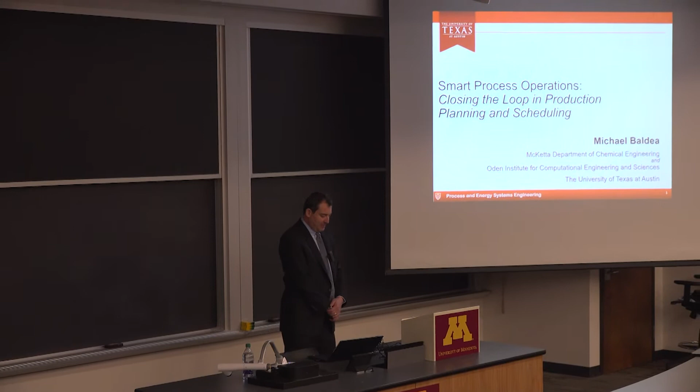All right. Thank you. Thank you for the kind introduction and for the invitation. I'm deeply, deeply honored to be here, honored and humbled to be back and see what the department has become. It was excellent in the day, and if I could say, it's more excellent now. I will say that it feels weird to be on this side of B75, so I took a lot of classes sitting on that side. I usually tend to sit towards the back, so it's okay. And it's a pleasure. It's a pleasure to be here.

And I will say this invitation really sent me down memory lane a little bit. So some nostalgia when I got it, and made me think of what we did back then. This is 16 years ago. It was a very nice group and a very intellectually stimulating group that we had. So a lot of work, but a lot of fun. So this is at the Daoutidis family home. We did a lot of globe-trotting travel. This was back in Romania, 15 years almost to the day. And I'm happy to report that Professor Daoutidis hasn't aged a single bit. Inside too. Inside too. So this was 15 years ago.

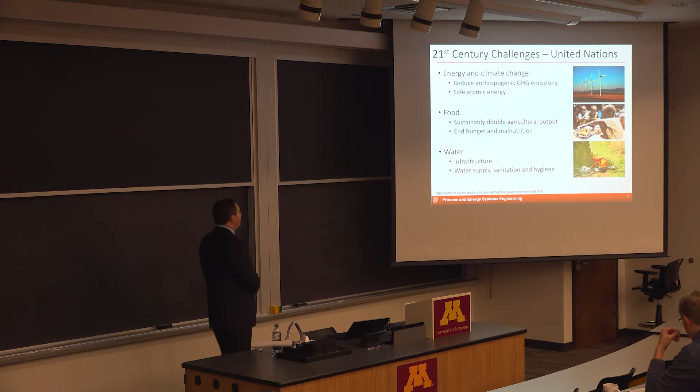This was the first decade of the new century, the new millennium. We're now in the third decade. And we're facing probably different problems than we were facing back then. Maybe not as different, but certainly more acute. So what I will talk about today is how systems engineering can and should be considered as one of the tools to take care of pressing issues that we as a planet are facing. And the United Nations took care of trying to set the framework for us, trying to define what the problems are. And obviously, as you'd expect, at the top of the list are energy, climate change, and then food and water. And this nexus of food, energy, water has been coined, and is something that a lot of people are looking into.

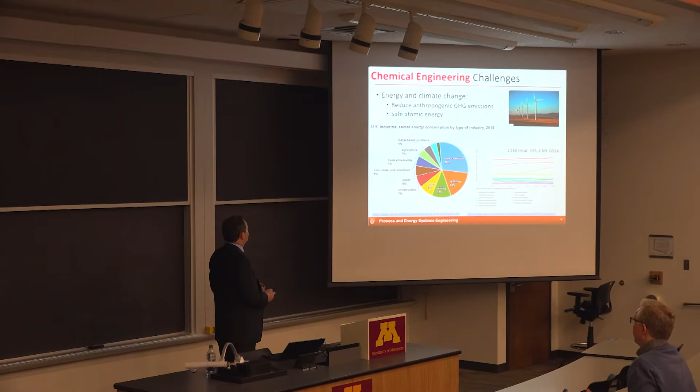But what I want to talk about today is how and why these are chemical engineering challenges. So why are they chemical engineering challenges? If we look at this picture, these are data from the Energy Information Administration. And the picture that we see here is that the chemical industry, at least in the United States, is a huge player in the energy field. So this shows the distribution of energy consumption in industry. And you see here that chemical and refining, which I argue is also chemical production, makes up a good chunk of that. Okay, so we're looking at close to 50%.

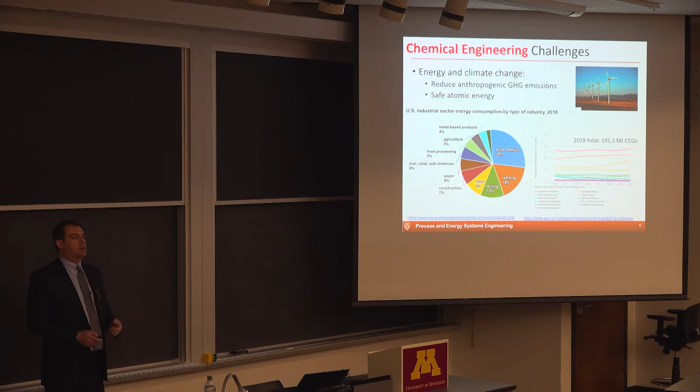So energy use and then carbon or greenhouse gas emissions, we're high up there, right, and growing. So the chemical industry is a huge factor in this landscape, this picture. And the natural question is, so we at the undergrad level, we teach process design, and it's a natural question to ask, well, can we design a new chemical industry that would be greener, more energy efficient, less impactful from an environmental point of view?

And if you look at the literature, there's a slew of papers you can go through, and it would seem that, yes, we can. So we can turn biomass into fuels. We can make plastics out of renewable things and so on. And so I think looking through all this, I think the answer in Minnesota style is you betcha, right? We can design a new industry. I think that's not the main question.

But I think the critical look at this literature and these results is that these studies tend to minimize, and again, we go back to our process design class real quick, they try to minimize the per unit costs. And we think back of basic things in our curriculum, and we say, well, that means we have to have larger and larger plants, right? So your economy of scale should kick in, and the bigger the plant you make, the cheaper the product per unit is going to be.

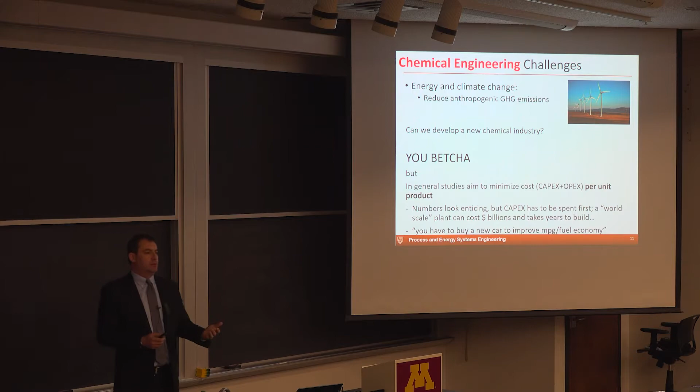The problem with that is a large-scale plant, a world-scale plant that would utilize some renewable things to make useful products is going to cost billions. So even the largest chemical company can't afford to do that. They can maybe afford one project like that at once, right? And they're really betting the farm. Two of them, if both of them fail, they're out of business.

So essentially what this is telling us is that you might actually have to buy a new car to improve your gas mileage and so on. So the question is, is that really what we want to do? And your grandma would be telling you that, well, maybe you can change the way you drive your existing car in order to improve your fuel economy.

So the realistic alternative to our current energy problems in the here and now is to look at how we can utilize existing assets, existing plants, in a way that's adapted to the current context, to the current energy landscape. So the question I'm going to ask today is, how do we adapt the operation of existing assets to the current context?

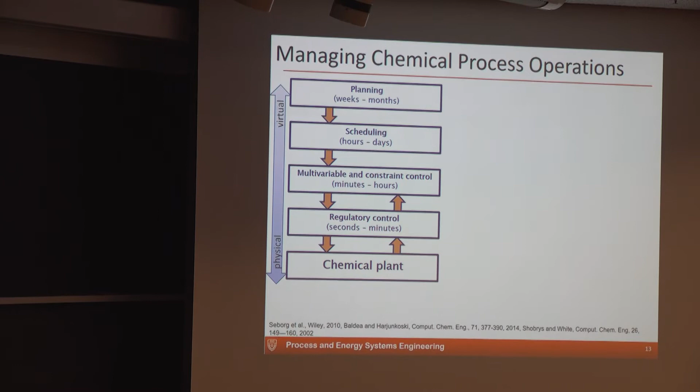So just to give you some background as to what I'm referring to, what exactly does it mean that we operate the chemical plant? So if we have a physical facility, there are several layers of decisions that have to be made in the process of its operation. And these decisions go in a hierarchy. We start with what's called production planning, and simply put, that's what to make, when to make it, and what quantity, such that we meet market demand and maximize profit.

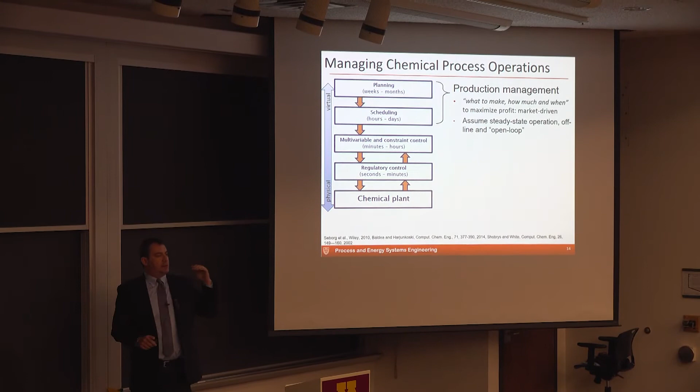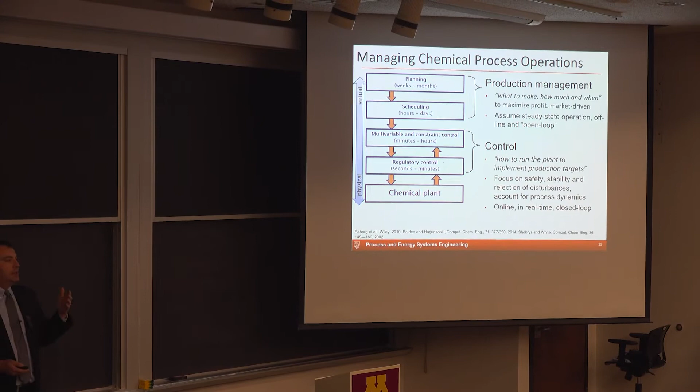And here, the main assumption is that we are operating at the steady state, so we have this facility, it will run for a while, it will make the same thing, then we switch to a different thing, and so on. By the way, these decisions are made over a long time horizon, so these are business decisions. And then in the here and now, we have control. So control is based on measuring current conditions, making decisions on that basis. This is done in real time, it's done online, and it accounts for the dynamics of the process. Here, since we're assuming everything is at steady state, we don't account for the dynamics of the process explicitly, at least.

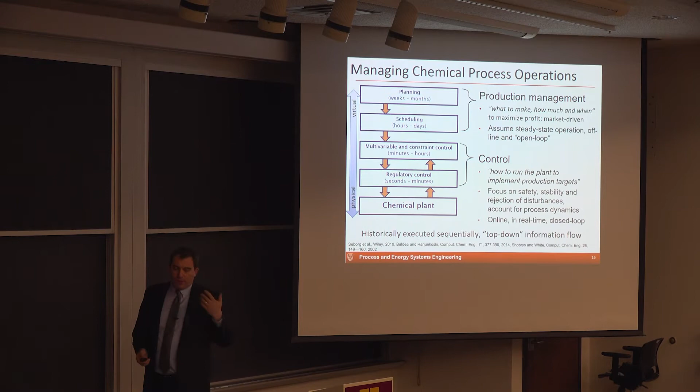Right, so here we have a hierarchy of decisions. This is how it's been done, top down. So whoever was in production management, the business entity, would tell plant operators who were in charge of the control system what to do, and there was not much feedback going on in the other direction. So naturally, when we started looking at this problem, we asked ourselves, is this established paradigm, by the way, this is adapted, just made prettier, from the textbook that you guys are using here for control, still true in today's world? So let's challenge these assumptions.

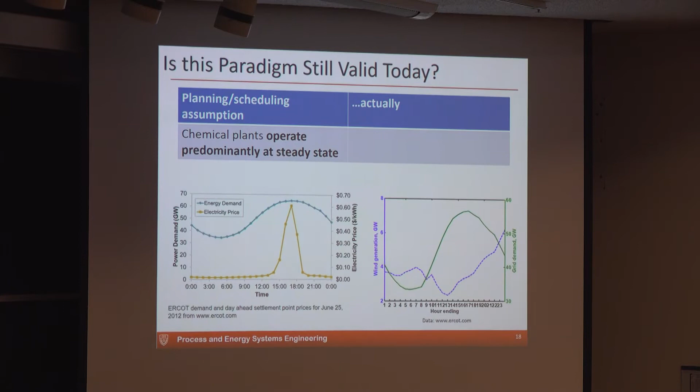And those are obviously driven by demand. So people get home at 5 p.m. and turn on the air conditioners and so on. So demand is going to be high on the grid at that point, and it's low early in the morning.

Right? They're also driven by the fact that now there can be up to 50% renewables on the grid. So wind blows harder early in the morning, so there's excessive electricity at this point. So electricity prices can actually go negative in real time, but this is desynchronized from demand.

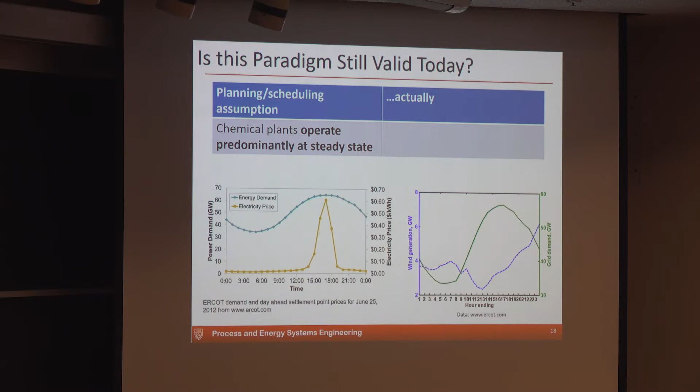So the point of showing you these data is that market conditions today are different from what they were. And market conditions today are highly, highly variable. So if you're the operator of a chemical plant that uses electricity, then you have to think of an operating strategy that can ride out that peak price and take advantage of the lows.

So you can think of an operating strategy where you up production when prices are low, so electricity is cheap, store whatever material you made in excess, and then when the prices of electricity go up, you would want to drop production, lower your power draw from the grid, and use the stored material to meet demand at this point.

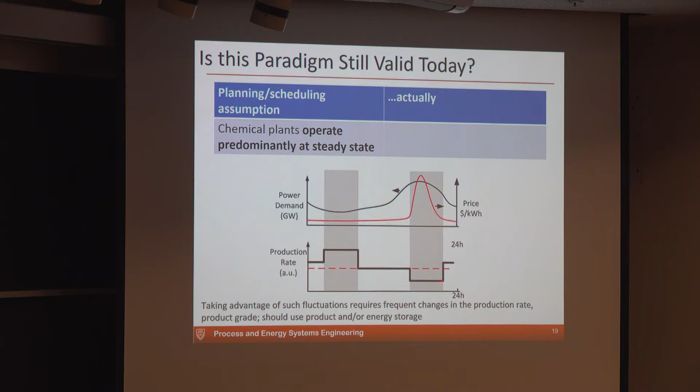So, of course, this strategy now requires very frequent changes in production rates. So you're no longer operating at a steady level, but you'll be going up and down quite a bit, right? So I will say this first fundamental assumption, that a chemical plant will be spending most of the time coasting along a steady state, is false in today's context.

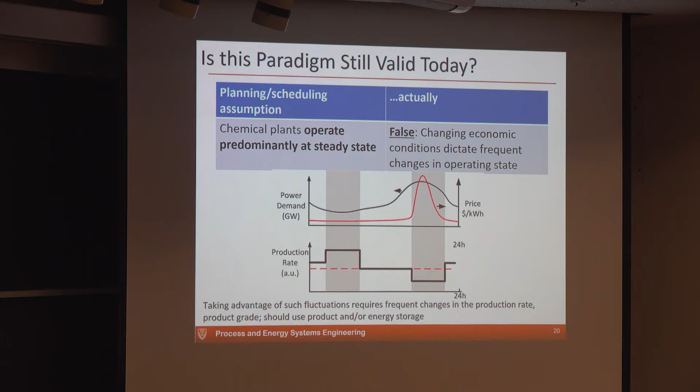We also assume oftentimes when business entities make their calculations that switching from one operating state to another, from one product to another, takes a lot less time than you spend operating at that steady state. Right? So these transitions can be done quickly or the time is negligible.

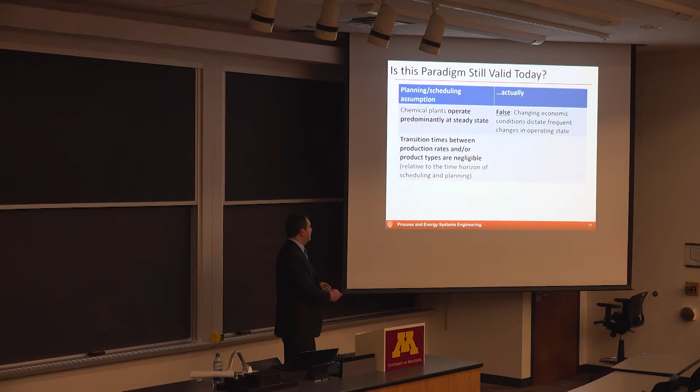So is that true? Let's look at the other side of the equation, across the fence at a chemical plant that uses electricity. Again, I'm going to use this example of electricity since that's one of the most dynamic markets that we're facing today. So this chemical plant is an air separation plant. That's the system that I spent a lot of time with in industry.

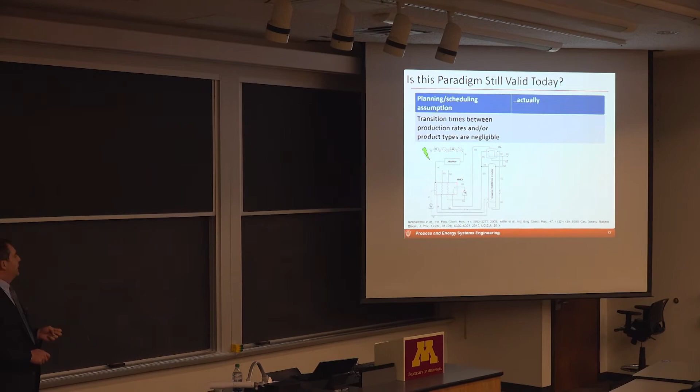The way it works, we'll go into more detail later, but in principle, it's a cryogenic distillation of air. So you have to compress, liquefy an airstream, and then distill it. And you make gas nitrogen here. The main thing is that the compression is driven by electric motors, and their electricity consumption is quite high. So this plant is essentially just an electricity user. Air is still free. The only thing they pay for is electricity.

So if I wanted to use this plant to increase and decrease production to track electricity prices, then I would have to decide at what level I produce nitrogen, if I make liquefied nitrogen or gas. Liquid can be stored, by the way, very easily. And I probably have to do that over every hour that the electricity prices change.

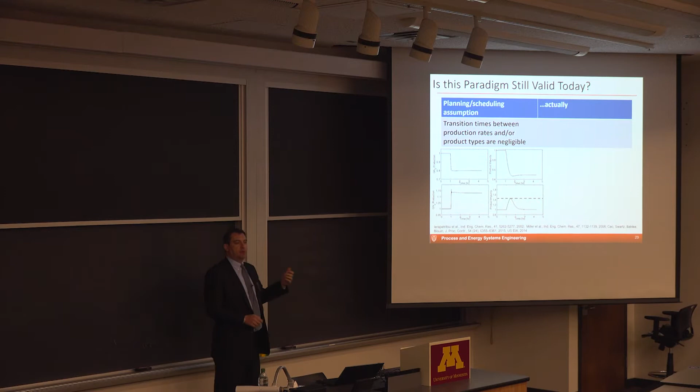So this plant can play nicely in the sense that production rates, and these are industrial data, by the way, can go up and down, so I can very easily alter my electricity consumption. The problem is the product that I'm making is a very high purity stream. There are plants that make nitrogen with parts per million oxygen. There are plants that serve the electronics industry with part per billion concentration, right? So very, very sensitive to any changes in operation.

And as it turns out, for this plant operated properly, the oxygen impurity level can change over a course of a couple of hours, even after one change in the production rate. So I cannot possibly assume that this transition time between operating states is negligible. On the contrary, it's about on the same time scale as the changes in production. And I also run the risk of exceeding some impurity limits, which would lead to severe contract penalties.

So again, if we are to track electricity prices that change on an hourly basis, I have to account for the fact that the dominant time constant, or the time the system responds, is also in the order of hours. Which means that I cannot assume anymore that transitions are negligible.

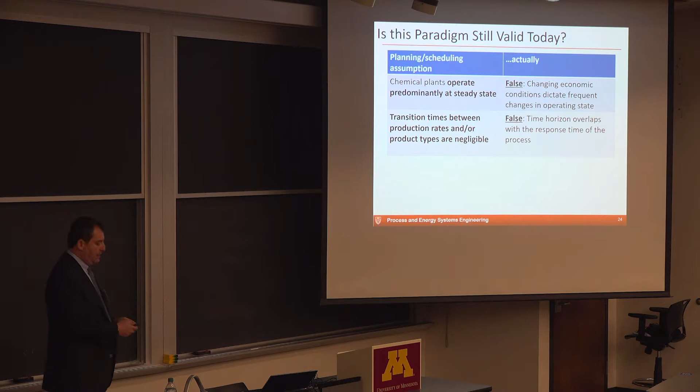So I have to account for these explicitly when I plan and schedule my production. And finally, we said market conditions. Back in the day, you could plan on some well-known electricity prices, feedstock prices, and so on, so we can assume that these are known or can be forecast accurately.

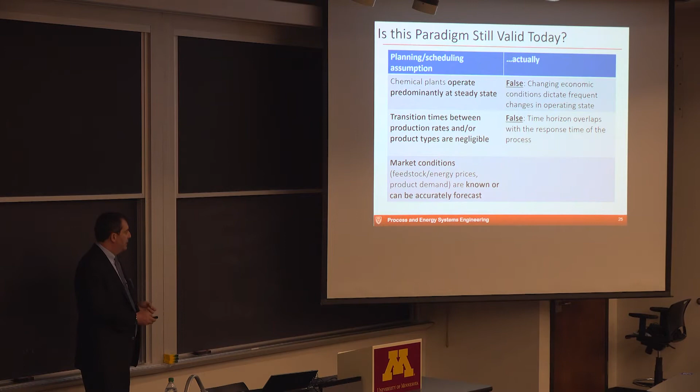Well, let's look at electricity prices over a longer time period. And there are two markets here. There's the day-ahead market, so something that you can count on to know every day at 3 o'clock. And then there's the 15-minute market, which is cleared 45 minutes before the prices come into effect. Right? Can you forecast this? If you can, you're going to be an instant millionaire.

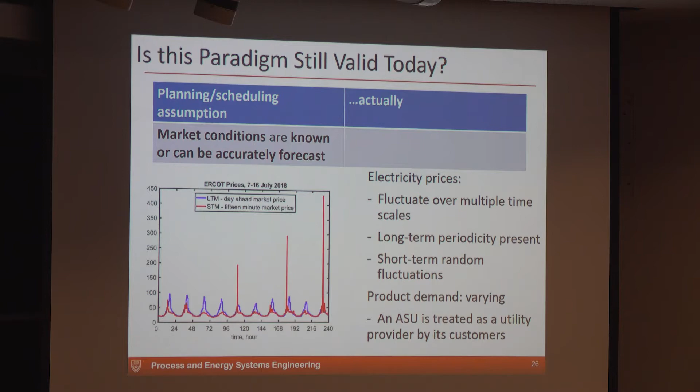You can't. So you can see some periodicity, but certainly being able to predict these ginormous peaks in the 15-minute market is impossible, right? You can prepare for them to some extent, but you don't know. So market conditions are capricious, and an air separation unit, if we were to refer back to our example, is usually treated by its customers as a utility.

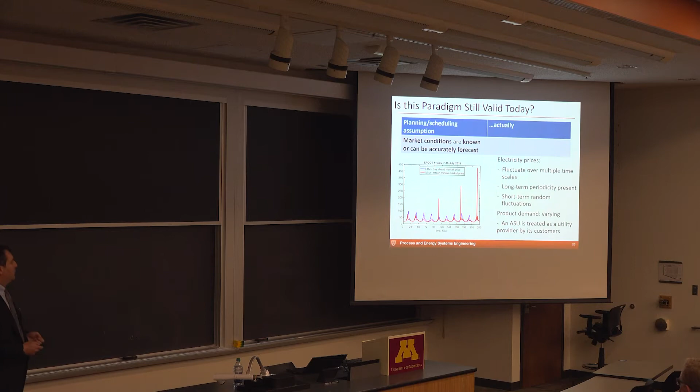So they expect to open the valve and oxygen or nitrogen will flow, right? They don't care when and how that's produced. It just has to be there, just like water or electricity. So I would give this one a partially true, so it's not quite a Pinocchio, but it's there. And that means that market conditions are difficult.

So we live now as an industry, as a chemical industry, in a highly variable environment. And that is what I am trying to define and deal with in the next part of this presentation. Which takes us to production planning and production scheduling, so what to make, when, and how much, and what the framework for planning and scheduling should look like under these circumstances.

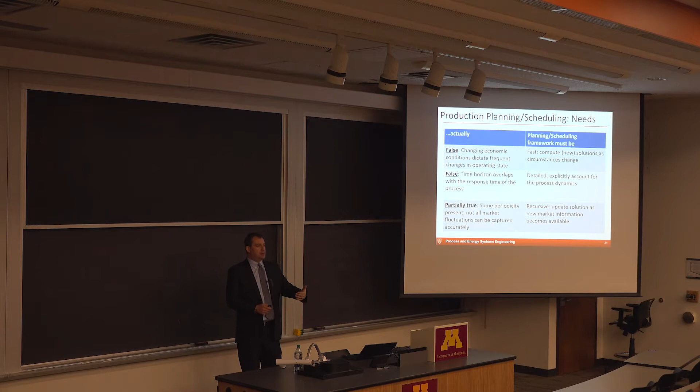So what I will argue today is that this framework needs to be fast. So we need to be able to compute new solutions as new information becomes available or circumstances change. We need to be detailed. So we have to have an unprecedented insight in the actual behavior of a facility. We need to understand its dynamics and account for them when we think of making business decisions, which we haven't before. And finally, I will also argue we have to be recursive, meaning that solutions have to be updated as soon as new information becomes available.

So what does a scheduling problem look like? It's an optimization problem, and I will use for now what I called word equations. So I'm going to try not to use a whole lot of math for now, and describe this problem really quickly. So what I'm trying to do here is to minimize the total cost over some time horizon in the future. And that total cost is a function of the power draw at any time instant and the price at that time instant. So I'm integrating that over time. There's some constraints here that say I can only make changes every hour in my production targets.

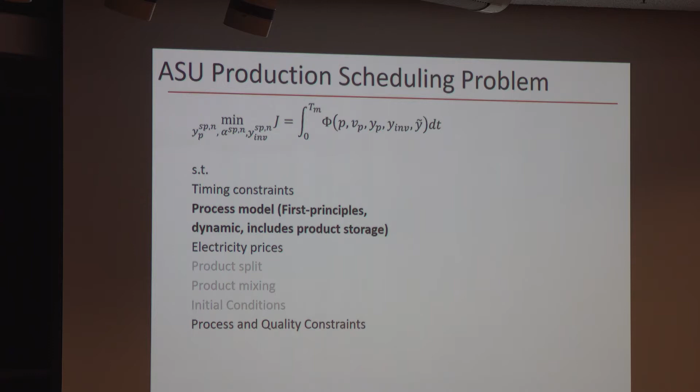And then I'm also incorporating a very detailed first principles model of this plant. So we were able, after about a year and a master's thesis, to develop an accurate dynamic model of an air separation plant. And we said we're going to use it to decide super accurately what the production schedule should look like in the presence of varying electricity prices. So what does the solution look like? Ignore this part for now. I'll explain that later. But let's start from here.

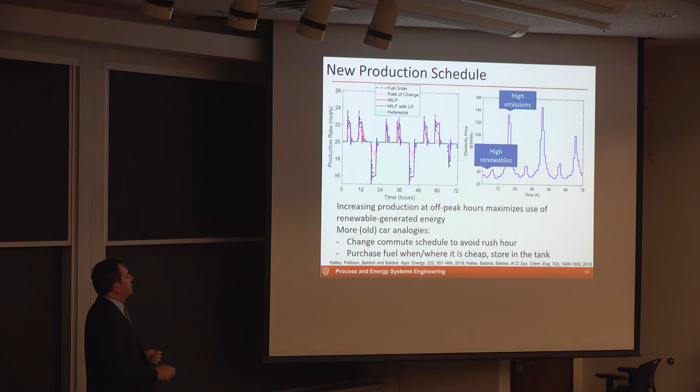So these are electricity prices. They're real electricity prices for 3 days. And you can see there's a little bit of peak in the morning and the big peak in the afternoon. These are generally ascribed to retail or consumer level residential use of electricity. And you can see that the production schedule, so this means the production rate and the associated power draw, are exactly in anti-phase with electricity prices.

So what this means is I'm going to make more nitrogen, liquefy it, store it in a tank, drop production when electricity prices are higher, and then really drop production when I hit these peaks in electricity price, and use nitrogen stored in the tank to satisfy demand. Right? So why is this important from an environmental point of view?

It's important because this is when renewable electricity generation is high. This time here is when generally fossil fuel peaker plants are brought online to meet demand. So this is when emissions are high. This is when emissions are generally low. So this is not entirely altruistic. We take advantage of lower prices, but indirectly we are helping the cause of lowering the emissions associated with the industry.

Now, the old car analogy here is we're changing our commute schedule to avoid rush hour, and that's exactly what we're doing, right? We make more stuff when prices are low and there's no congestion on the grid. Then we also buy fuel where it's cheap and store it in the tank. So by changing our driving pattern with this analogy, we are actually improving profitability for the plant, and we're also helping the environment.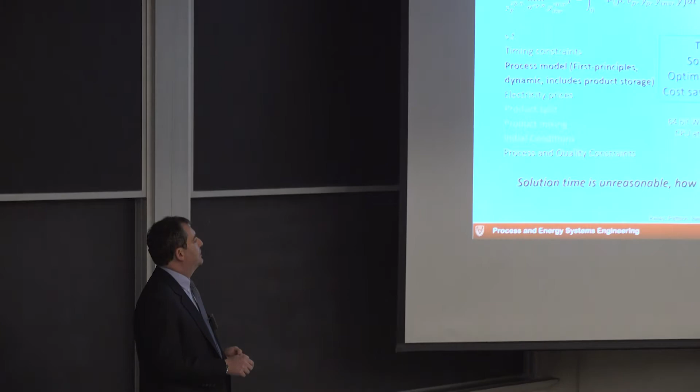Now, what does this amount to in numbers? This is a small plant, so it costs about $1,000 to run for 3 days. It's not a whole lot of money. But compared to constant production rate operation, we're saving 1.2%. And these are numbers that were verified with industry. So is that a lot? It is a lot, because in an industry that's more than 100 years old, you can imagine they squeezed about everything they can out of their facilities. And now if you can come in and say, hey, with no capital investment, just a change in your operating strategy, I can give you 1.2% savings, that is huge.

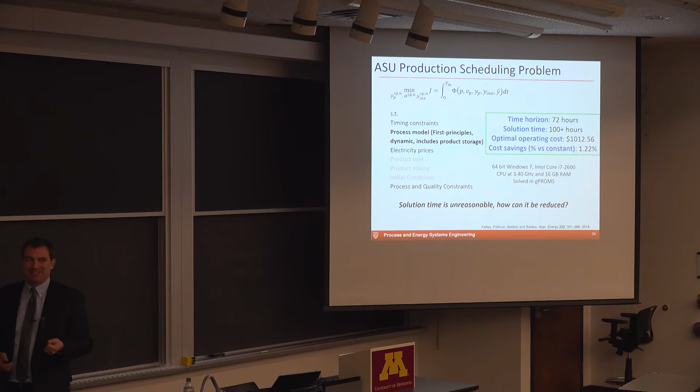The problem with this solution was that we looked at 72 hours ahead in time. It took us 100 plus hours to solve this problem initially. So I went to our student and I said, well, is this really important practically? And the answer is, of course not, right? You can't expect that this will be useful. The time has passed. The ship has sailed. You need a much faster solution for this class of problems.

This is a dynamic optimization. These problems are generally known to be challenging to solve, especially because of the size of this model. This model ended up having around 5,000 equations. It was highly nonlinear and difficult to deal with. So our next challenge was to say, well, if we really want to do this, we have to come up with something that's fast. And the main observation here was empirical initially, and it goes back to the time when I was doing my thesis at Minnesota.

And the observation was that chemical plants generally have a few dominant dynamic modes that are pretty slow. And those are small in number compared to the general size of the model of a chemical plant. Also, combined with the observation that not all the variables that you can measure in a chemical plant are relevant to production scheduling. So you would care about production rate and product quality, but you may not care about the temperature at the bottom of the distillation column and so on. So what that tells us is that we can, and we should, use a lower dimensional dynamic model.

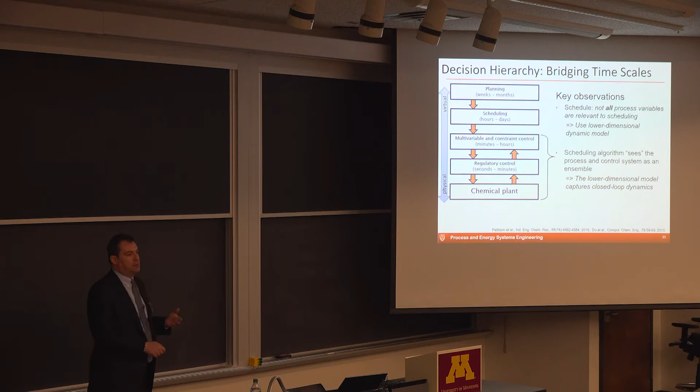We also notice here that what scheduling sees is sort of the ensemble of the chemical plant and its control system. So we might, again, not care in great detail about what this information exchange is. We just need to model this ensemble. Right, so this lower dimensional model can capture what we call the closed loop dynamics of the plant, the dynamics of the plant and its controller.

So this is why we came up with this concept of a scale bridging model. It's a low dimensional model that captures the input-output behavior of a plant, meaning that it will tell us what the scheduling relevant outputs do when we change production targets at the scheduling level. So that includes the process and its controller, and this model can be embedded in a scheduling calculation. And scale bridging meaning that it bridges the time scales between the relatively fast dynamics of the process and the longer time horizon that we consider when we do production scheduling.

So going back to our air separation plant, well, what are these scheduling relevant variables? And again, we did this empirically initially. Later, we were able to come up with a data-driven approach to actually automatically determine what these are. But we looked at what are they? Well, it's the production rate and the power consumption of the compressor. There's a liquefier here to store liquid nitrogen. There's a temperature driving force here in the condenser of the column.

There's some holdup in the reboiler condenser, sorry. And then there were a number of temperature constraints around here that were mostly related to safety. And then finally, we had a tank capacity constraint. So you can't overfill it and you can't drain it all the way down. Right, so that's it. Out of the 4,000 odd variables, this was all we needed.

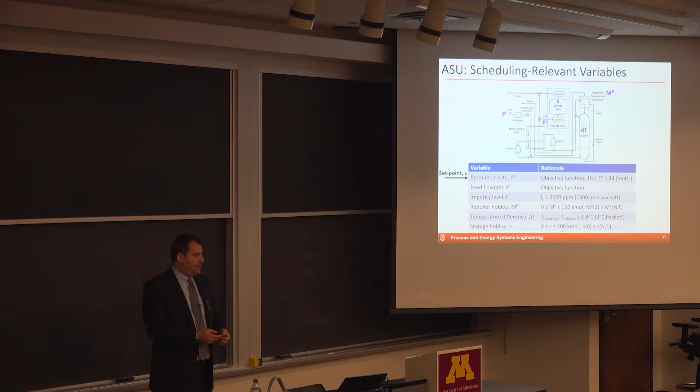And we were able then to learn from operating data, we were able to learn how to model these variables. And we chose a model structure which turned out to be hugely consequential. You can do it in any way possible. There's many ways to learn dynamic models, etc.

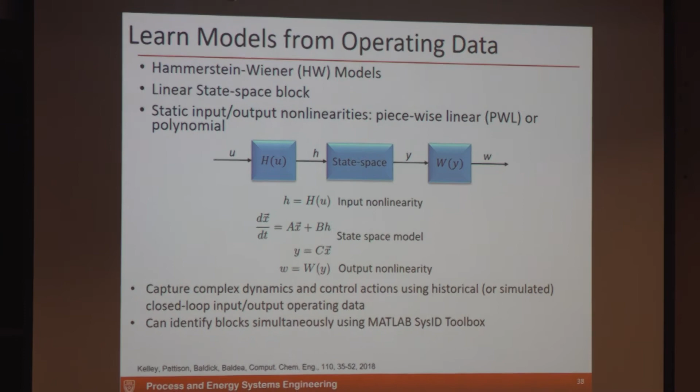Why we chose this Hammerstein-Wiener structure, which consists of a linear state space dynamic model flanked by two static, so not time-dependent nonlinearities, is this allowed us, first of all, we were lazy, so there's already a good set of tools available to identify these models, so that cut the time. But as it turns out, these models then give rise to a very interesting problem structure for the scheduling problem.

So this was Morgan Kelley's realization that these models can, under specific circumstances, be linearized exactly. So now you've turned a nonlinear problem into a mixed integer linear problem. And then further, that problem has this incredible structure that lends itself to a Lagrange relaxation approach. So without going through the details of how that's done, I can show you the progression of the solution time after applying these successive techniques, right?

So first we started with the full order model. So we used the dynamic model that was derived from first principles. We said 100 plus hours of CPU time. We used the Hammerstein-Wiener models by themselves. That cut it down by a factor of 20. And really the results were ostensibly the same. We then formulated this as a mixed integer linear program by using our linearization techniques. Well, that cut it down to 12 minutes. Then with the Lagrange relaxation, we cut it down to 7 minutes with really very little change in the value of the solution.

So the main thing here was by understanding economics, scheduling, dynamics, physics together, we were able to devise a strategy for reducing the solution time of a very interesting and important problem by orders of magnitude and without any real penalty in the results.

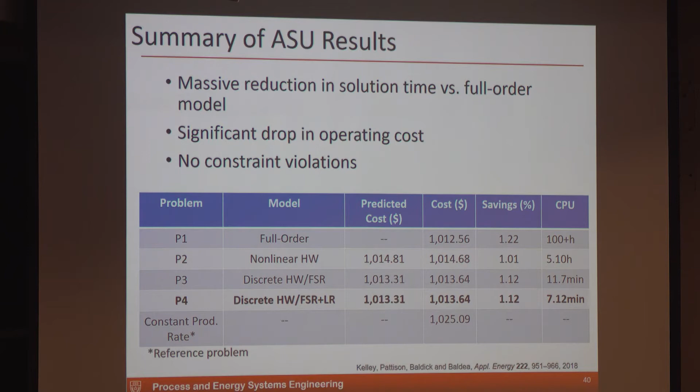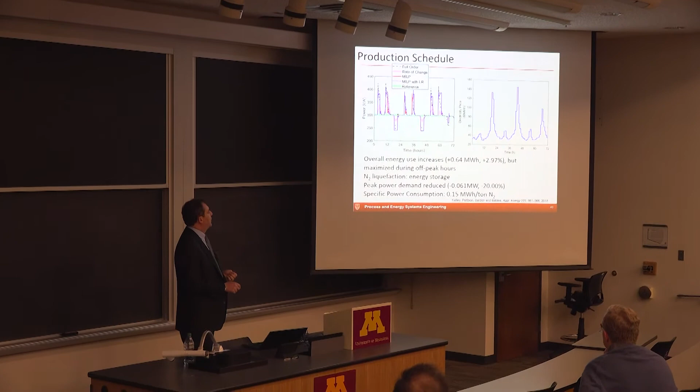So what does the schedule look like now? Well, that's why I'm showing these different strategies. You can see the schedules are essentially the same. The reference point being this constant steady state operation. So you can see overall there's a penalty to be paid by playing the market, and that penalty comes in the form of increased energy use. So liquefaction is not free, right? You have to remove that latent heat, and that to the tune of about 3% increase in energy use.

But this energy use is maximized at off-peak hours when wind generation is very high to the point where they have to curtail wind generation. We use nitrogen liquefaction as a means for energy storage. So instead of using a battery at the grid level, you're storing energy in the form of molecules, which is cheap, right? Grid level batteries are expensive. The other benefit of this strategy is that peak power is reduced. So when demand on the grid is really high, we're actually low. And then the power consumption is in line with whatever you'd pay today in terms of making nitrogen.

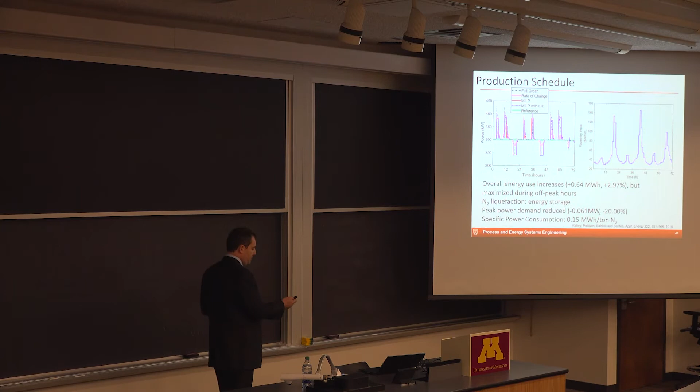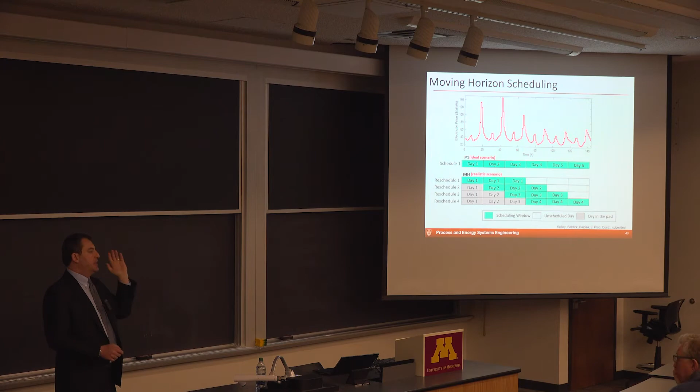So, of course, this is not perfect. The key assumption here is that you know electricity prices 3 days in advance, which you don't, clearly. Right? There's no way you know them. You will know them for 24 hours, but you don't know them 3 days in advance. So what do we do? What we did was to switch to a moving horizon approach. So our approach was to say, well, we really don't know, and maybe we don't need to look that many days ahead. What we can do is make a decision today, update our information tomorrow, and shift our horizon by 1 time unit, 1 day, and then keep going that way, right? So on a moving horizon, we can keep making our decisions.

But the question is, well, I don't know 3 days in advance either. I just know 1 day. So we have to say, let's be lazy. Right? Lazy is good. Lazy was the solution here. We said, well, given that these prices are kind of periodic, what would you lose by just saying, well, what if today is like tomorrow? And the day after tomorrow is like today.

And then tomorrow, I'm just going to say, well, I know the prices for today, but I'll assume the next 2 are the same. Or I could take the day from the week before. So today is Thursday, tomorrow is Friday. I'll take last Friday as my prediction and so on. So that way I can account for weekly changes. What would you lose? And not much, right? So here, with the omniscient strategy, we know we can reduce prices by about 1%, or operating expense by 1% over 6 days. Here, we're 0.8% down.

So by applying this strategy, which assumes nothing in terms of predictions, we don't have a prediction mechanism. We just take the super lazy approach. We're still doing well. And why is this important? This is important because now you have to go convince practitioners. And the practitioner will say, well, I don't know how to forecast prices. Well, you don't have to. You can just do this.

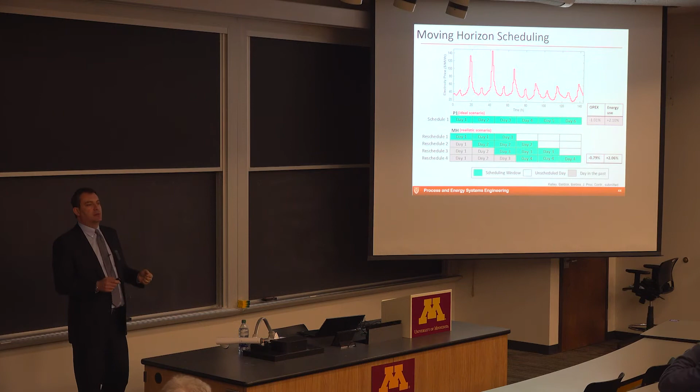And of course, it's important to study this over a range of scenarios, right? One single experiment is worth nothing. So we, of course, went and did a lot of scenario-based studies where we looked at the electricity prices and we said, well, the uncertainty in forecasting prices kind of increases as you move up in time. We solved this as a chance constraint problem. So this is a problem for optimization under uncertainty where you're saying, I will meet the condition of having a feasible solution for alpha% of our scenarios. So let's say 95%.

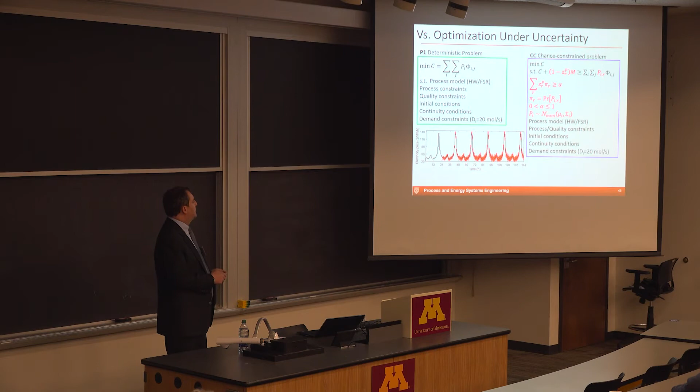And then how does this compare? So I'll present some results here. This is our base case with no schedule optimization. Then we look at knowing everything for 6 days in advance. Here's the chance constraint scenario. This is the moving horizon scenario for the first set of prices that I looked at. And you can see the difference here is quite stark, right?

So this chance constraint solution is more of a conservative solution. It says, I need to have some probability of guaranteeing that I will make the product that I need to make at the rate I need to make it and so on. So generally what this means is that I use more storage. I store more material. So I'm just bulletproofing my solution.

But if I look over 200 scenarios that we generated and compare the mean for the chance constraint and moving horizon approaches, they're ostensibly the same. So what this tells us is that this very lazy moving horizon approach is as good as a relatively sophisticated way of bulletproofing your solution against uncertainty. And not only that, it's economically very, very interesting.

So the benefit of what I mentioned here is that the moving horizon approach can be updated with lots of other information, such as weather, which impacts the operation of a plant like this, can be updated with information about product demand and so on, whereas if you were to do this in an optimization under uncertainty context, the problem size would grow considerably. So this becomes advantageous as the complexity of the problem grows.

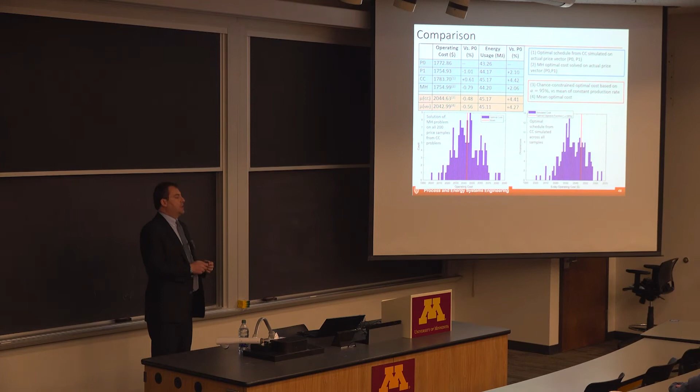So what's going on now? Well, we're actually doing this on a real plant that makes oxygen, nitrogen, argon. We're doing it based on plant data, so now we no longer have a model, and we're going to try to do it just based on data collected from the plant. And we're dealing with essentially a very big data problem, looking at enough time windows to be able to get a decent model. So I guess stay tuned for those results. We have some initial publication, but there's more to come, and hopefully this year we'll have a field implementation.

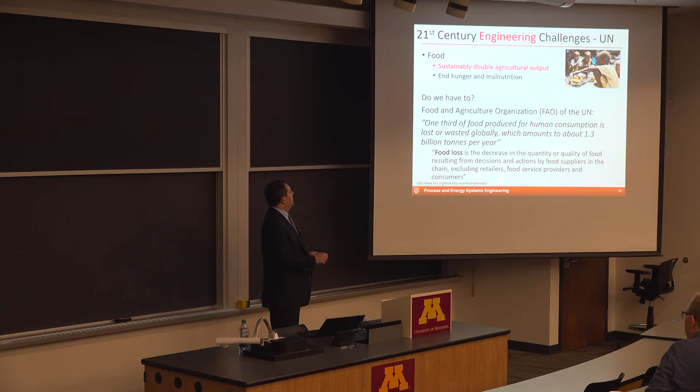Right, so let me close the chapter on energy and start thinking about food. So food is obviously a big problem. There are statistics that I've seen from the FAO that said that malnutrition is a huge problem, food security is a huge issue, and the United Nations has some goals that are ambitious. We want to sustainably double agricultural output and end hunger and malnutrition. And again, the grandma question that I'm going to ask now is, do we have to, right? Do you have to buy a new car? Do you have to double production? I don't think we do.

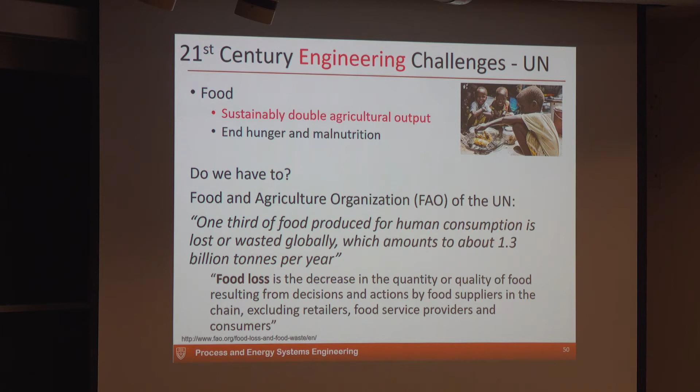Also, the United Nations says 1/3 of the food that's produced for consumption is wasted, right? 1.3 billion tons a year. That's a huge amount. And food loss is the drop in quality below acceptable levels from the suppliers, the manufacturer, through the supply chain. So it's natural to ask yourself a question: how can we prevent this terrible occurrence, essentially? And this doesn't look in any way at our fridge, right, where there's a lot more food wastage.

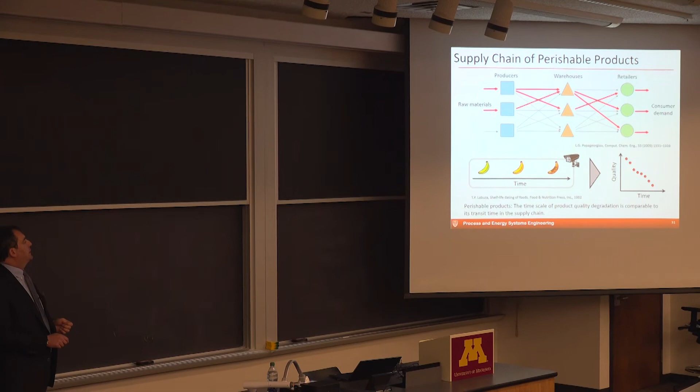So what does the supply chain that we're dealing with look like? Right, we have producers, raw materials. This could be fertilizer, anything. So these guys would produce stuff, send it to warehouses, and then this gets distributed to retailers. So this would be Cub Foods, Rainbow back in the day when I was here, and then get to us.

And you can imagine a banana going through this across borders, across countries, across shipment methods. It starts off green and it ends up black. And we know these make the best banana bread, but they're not the most appealing to buy. And the question is, well, how long does this take? Well, it doesn't take that long.

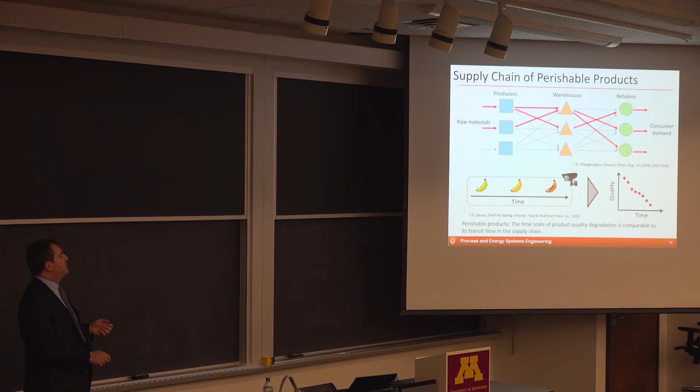It takes about as long as the transit time through this entire supply chain. So this is what defines what we call a perishable product. The perishable product is something that has a relatively quick degradation rate compared to its transit from producer to consumer. And you can see here that we have quality. I don't define quality specifically now, but you can imagine that we start somewhere here, and then this quality will eventually degrade below some threshold that defines the usability of that product.

So how do we model product quality? We'll call it Q. So we write the differential equation that gives us some time dependence. And this quality is a function of itself in a sense. It's also a function of environmental conditions. So this could be temperature, for example, for storage. It could be the presence of ethylene, which is used for ripening. There are other conditions, humidity, for example. So all these could be part of this model.

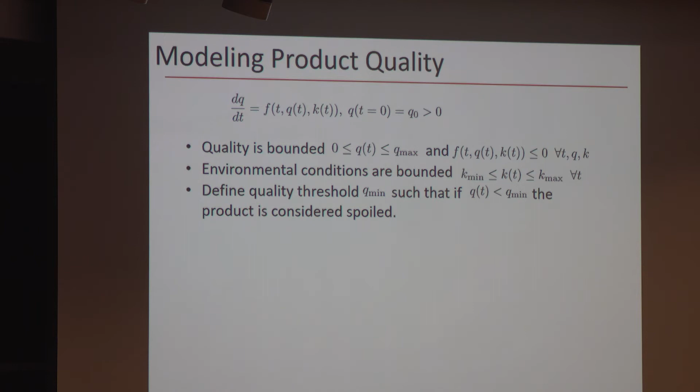Now, quality, you have to imagine, think practically, think mathematically. Quality is bounded, right? There's an upper bound of how good a piece of fruit can be, and there's obviously a lower bound beyond which you're not going to eat it. So there's a min and a max on quality. And this function, we can assume pretty safely that it's monotonic and that quality is monotonically decreasing. So the quality of a piece of fruit is not going to get better. It only gets worse over time.

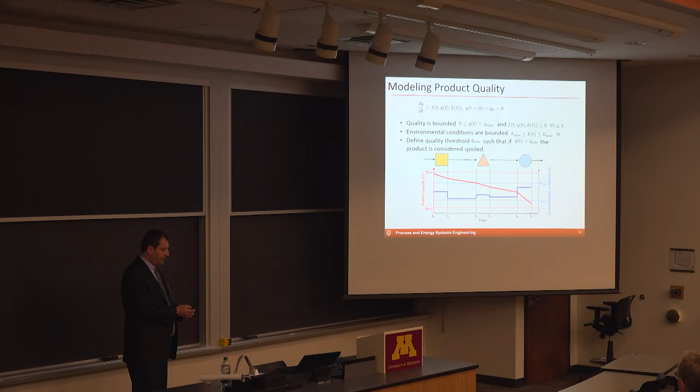So our task is to find these inputs over time during the passage of this product through the supply chain such that at the end point here, the quality is above some threshold such that it meets its minimum quality standard, but at the minimum cost. So that means we could vary the temperature, we could vary humidity, we can vary storage time, etc., before this product goes bad. And it's incredibly difficult to do because this becomes a multi-scale problem, right?

The time scale of the supply chain planning activity is in the order of weeks or even months if you consider back orders and so on. Whereas the dynamics of the quality, how long does it take for a banana to go bad on your counter? A few days, right? So we're looking at a few days, and these time horizons kind of overlap. So we have to account for what those are.

So at the supply chain level, it's very simple. Each node is modeled as an accumulator, a tank, if you will, which has an inflow and an outflow. And then we integrate quality in these inventory balances by saying, I will assume that I'm quantizing quality levels. So there's Q, and there's a delta Q at every time instant, and I'm indexing inventory levels over that. So I keep track of inventory of every quality. I have a level of excellent bananas, a level of mediocre bananas, a level of bad bananas, and then I know what the inventory of each is going to be.

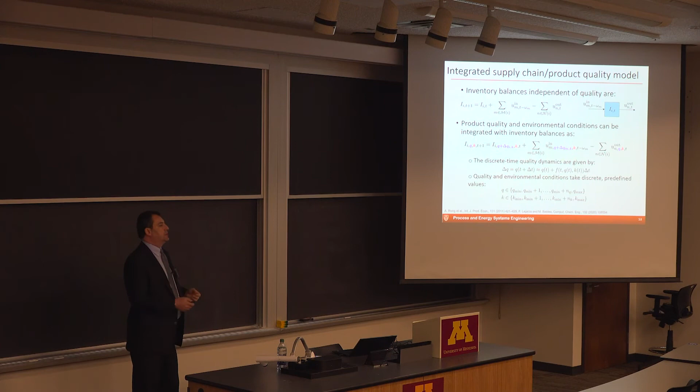So with that, we can formulate this problem as kind of an input-state-output model, something that a control researcher would deal with or understand. So we've shown that this is possible, and we can write the system dynamics in this discrete time form. We also impose some constraints. Here they have to do with how much inventory you can store in a warehouse, and transshipment between nodes. So how much can you ship from one place to another? Let's say if you do it by train, how much can you fit in a rail car? If you do it by truck, how many trucks you have available, and so on.

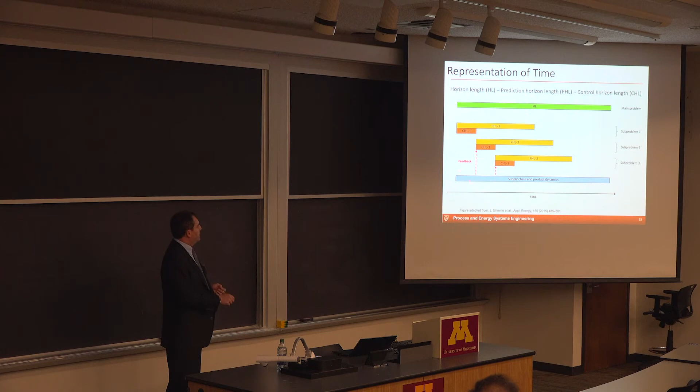So typically the way this is approached is one would plan production, shipment, storage, and so on over a whole time horizon, let's say about 3 weeks. What we propose to do is to break this down into a moving horizon problem, akin to the scheduling problem that I presented before, where the control horizon is the amount of time that we take between decisions, and the prediction horizon is how far ahead we assume we can see in terms of product demand and product degradation. And this is much shorter than what the traditional problem would look like. And in the meantime, we take measurements of product quality from the product itself.

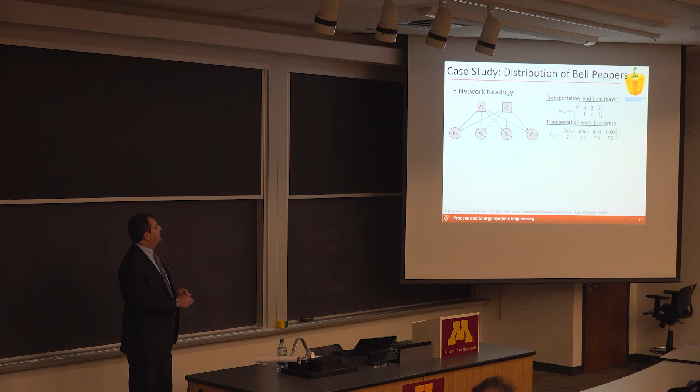And here are some interesting assumptions we make. So this is the lead time, meaning how long it takes to get from one producer to one retail node. And you see here that starting from this guy, it takes 2 to 3 days, whereas this supplier can supply in 1 day. But the costs are quite different. So if you have enough foresight to order, you pay about 10% of the price of the just-in-time supplier. Right? Admittedly an extreme case, but not unrealistic. So if you expect your stuff now, it's going to cost you.

So the dynamics we model, the degradation of quality, we quantify it in some relative arbitrary unit, and it goes from 600 to 750. And the temperature, so this is a function of inverse temperature, and we again assume that there are some temperature levels that the warehouses and trucks can operate at. So this is degrees Celsius or Kelvin. So the question is, well, knowing how much demand I have at these nodes, how do I plan ahead? Where do I order stuff from such that the cost is minimized and spoilage is minimized as well?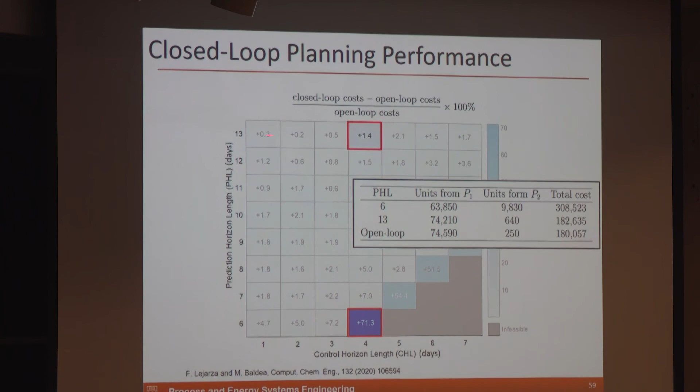And you see that if, let's say, I replanned every 4 days and I look 2 weeks in advance, I'm not too far off. If I do it every 4 days but only look 6 days in advance, then I'm really far off. So the cost's almost double. But this is encouraging, right? It says that we can do this without much loss, and I will show there's actually a benefit to applying this strategy. So the benefit of applying this strategy is more obvious if we actually do a hybrid approach.

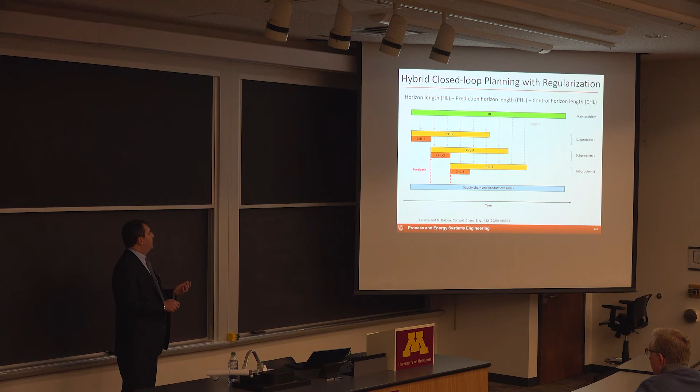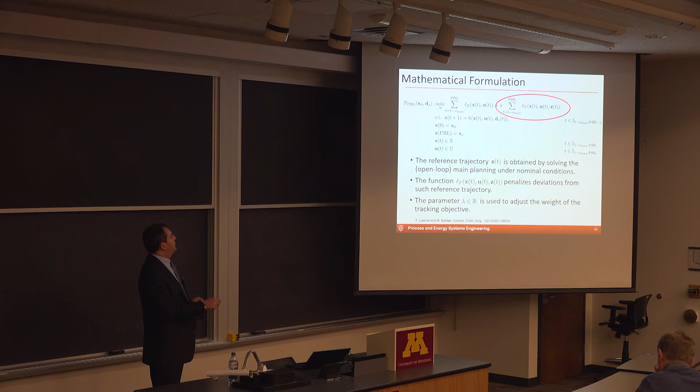So in this hybrid approach, what we will do is we take the solution of the main problem over 3 weeks and use it as a base case. So whatever we do over repeated receding horizon decisions is just going to be a correction from this main problem. And the way this works is in the receding horizon problem, we add a regularization term or a penalty term that penalizes the deviation of the solution of this problem from the solution of the nominal problem. And we can adjust how much we bias towards the nominal problem by adjusting this parameter here.

So it's illustrative to look at some case studies. One of them would be to look at the main planning problem for nominal demand and look at actual demand. So assuming the demand is constant is kind of the base case, but we also look at how demand can fluctuate over time. And you can expect that that's always going to be the case.

We also look at the fact that we cannot perfectly model the degradation of produce. Produce comes from different sources. They're never going to be the same. So their behavior over time and their rotting behavior, if you will, is going to be different. So it's interesting to see here that the production levels between the usual formulation of receding horizon and this regularized problem are going to be very different.

If we don't apply the correction, there's going to be these hiccups when we really have to place some rush orders for the expensive producer, and the cost is going to be very high. Whereas if we apply the regularization term, the production level for the cheap producer is going to be flat, and there's going to be some minor corrections from the expensive one.

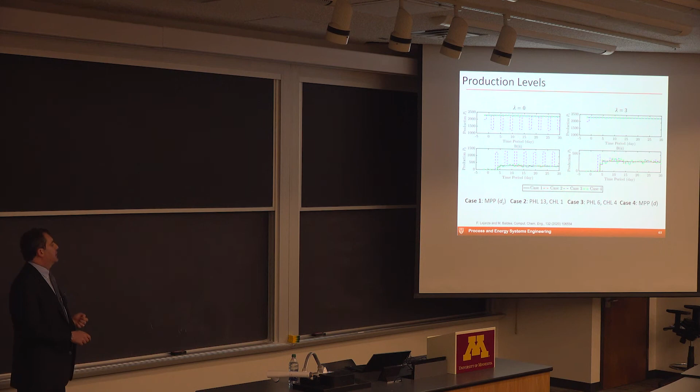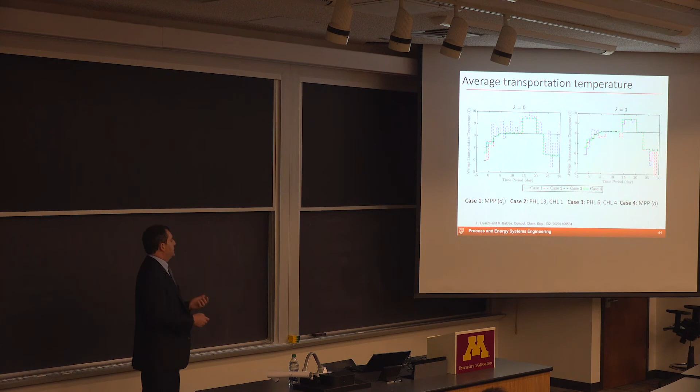The same goes for transportation temperature. So here we have this nervousness in temperature, whereas with regularization, temperature is actually pretty well stabilized. In terms of total cost, by applying this lambda correction, the cost of our strategy is very close to the case that has perfect knowledge of all the disturbances. But the computational cost is significantly lower if you look at these cases.

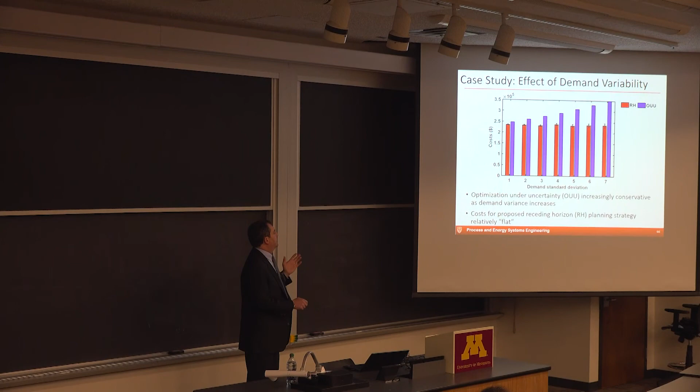What's interesting here is if we take into account variability of demand. And obviously, we have to look at a lot of scenarios, which is what we did here. And demand standard deviation tells us how much demand fluctuates. And you see that with this optimization under uncertainty approach, when we account explicitly for uncertainty in demand in a different formulation similar to the one I mentioned before, the solution becomes more and more conservative. So in our case, if we update the information, the cost is really oblivious to the fact that demand becomes more and more uncertain. But when we try to account for it explicitly, the costs go up quite a bit.

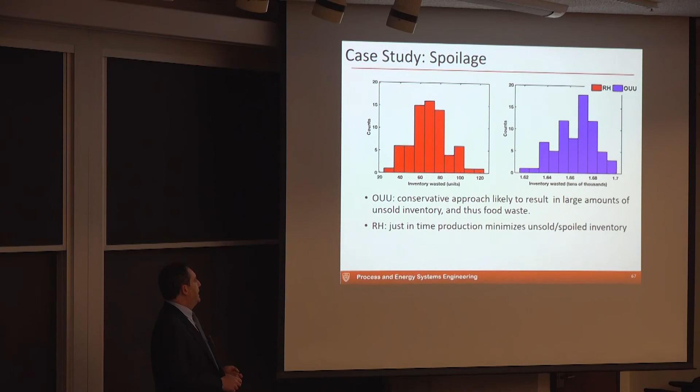And well, that takes us back to the United Nations problem, how much product gets spoiled. If we have this, let's say, cautious supply chain where we pre-order a lot in order to meet the demand of choosy consumers, you see here that the inventory wasted is many orders of magnitude higher than the inventory we would waste by applying our approach of ordering and updating the solution as more information comes in. So here, the optimization under uncertainty says, let's order as much as we can so we have enough inventory at different nodes, whereas here, we just order as much as we need.

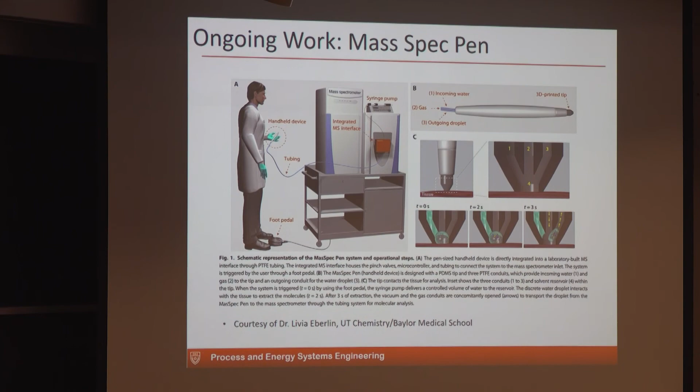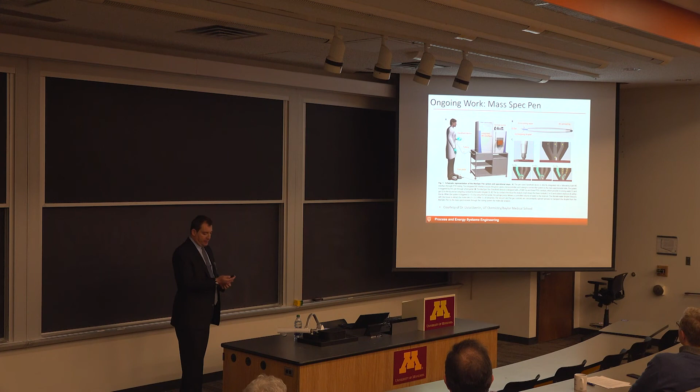So with that, I think I need to bring up what's the latest and greatest here. We're working with our colleague in chemistry to come up with methods to actually measure product quality and quantify it, taste or smell or color. We're developing a mass spec pen that, well, they've developed it already, but we're adapting it to measuring product quality and getting real-time measurements that can then be used to update these calculations. So hopefully, with some support from one of the bigger supermarket chains in Texas, we can implement some of this.

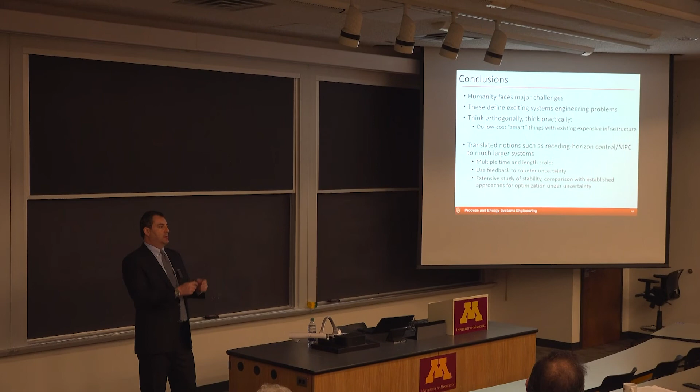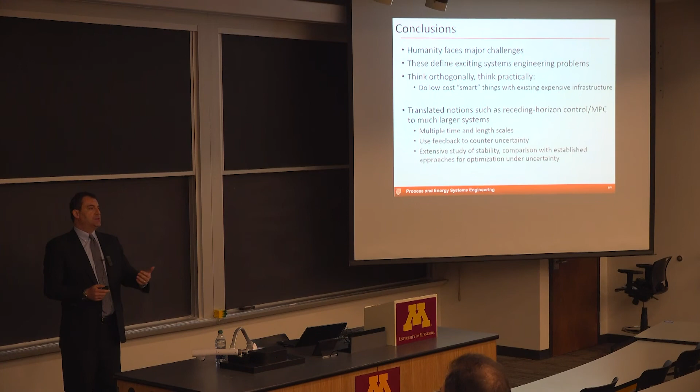So with that, I think it's time to close and draw some conclusions. I think what I tried to show today is that we are, as a race, as a planet, facing some big challenges. And I think that by thinking in the systems way and thinking orthogonally to the canon, to the current practice, we can come up with exciting solutions that are low cost and easy to implement and use existing infrastructure. So they don't require a whole lot of infrastructure development. Now, the fundamental notions that we developed here are the extension of concepts from model predictive control, which is an established theory and approach in the control of chemical plants, to much larger systems that can span multiple length and time scales.

Fundamentally, we argue that we can use feedback to counter uncertainty. So updating information is oftentimes better than preparing for the unknown. And we do have extensive studies at the theoretical level of the stability of these approaches. We've compared them also extensively with established approaches for optimization under uncertainty, and I think the results are very, very favorable.